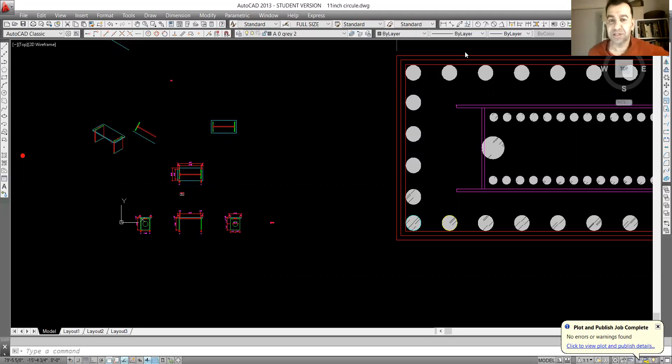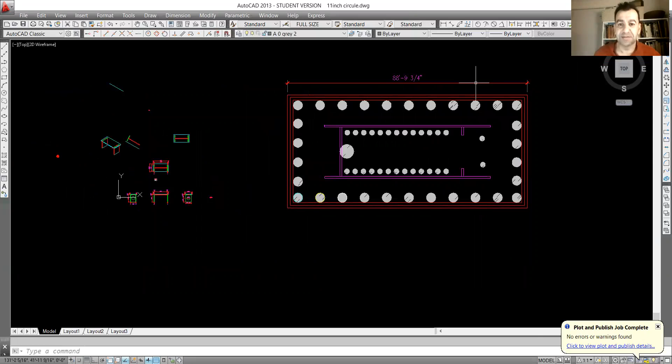One of the most challenging things about AutoCAD is, after using the program for a while, we all start generating drawings in this black space. We can make very small objects like this plate, or gigantic objects like this temple that's 88 feet. One challenging thing is how do you plot or print something like this on a manageable piece of paper? AutoCAD does not make it very easy, so I'm going to explain all the steps it takes to make a beautiful, well thought out drawing.

First step, before I print anything, I have to make sure I have the right layers and the right objects in the right order. So I'm going to open my layers. I have the option to create as many layers as I need, but I already created a bunch for this specific project. I created a layer called A0 and set it to color gray.

Notice when I click this, it's gray. I only use the colors at the bottom of this chart - these are the only ones that my plot style recognizes. Trust me and use any of these colors between 1 and 9. That's all you need to have good quality drawings. So I have A0, A02 - very light, medium, dark, very dark, and super dark.

So I know that blue is light, medium, red is medium light, magenta is darker, cyan is darker, and these ones are very dark. This is how I plan my drawing before I start.

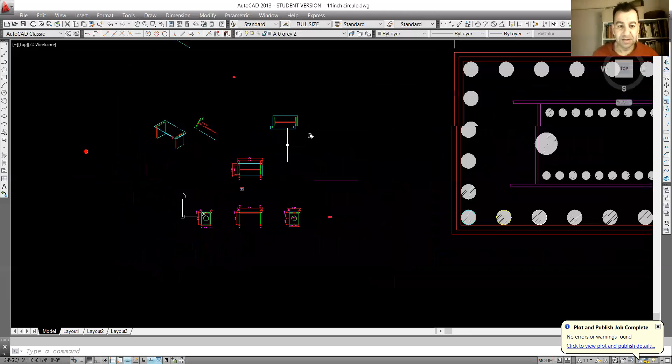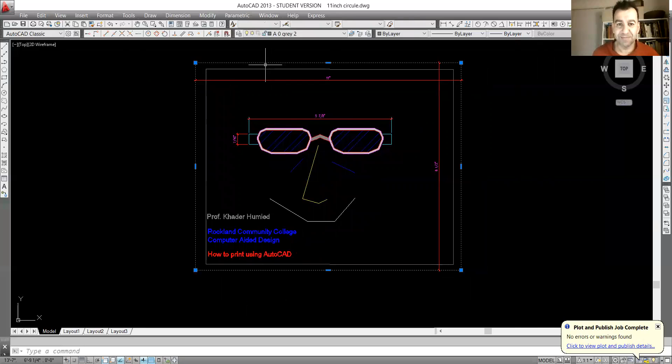For this exercise, I drew this simple project - a pair of glasses. Because I know the size, I can print them 1-to-1, where 1 inch on paper equals 1 inch in reality, and they fit on a piece of paper. I drew a box that's 8.5 by 11 inches, and offset it half an inch to create a border, because most printers don't print exactly to the edge, so I wanted to preserve my edge.

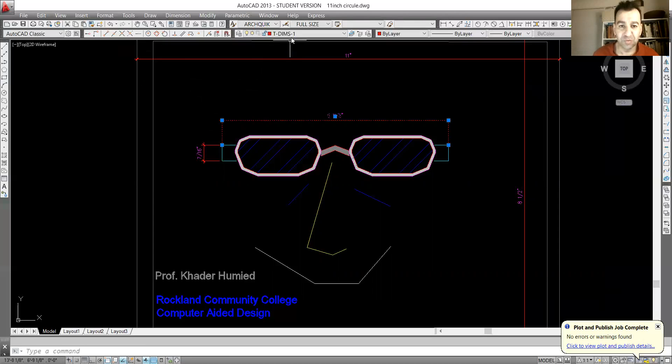I noticed that by mistake, when I click this dimension line, it says medium 4, but when I click this other dimension line, it says T dimension 1. I want them in the same layer. I have two ways of doing it - I could select match properties, pick up this and drop it there. Now when I click on this, see how it says T-DIMS-1? So these two dimension objects are now in the dimension layer.

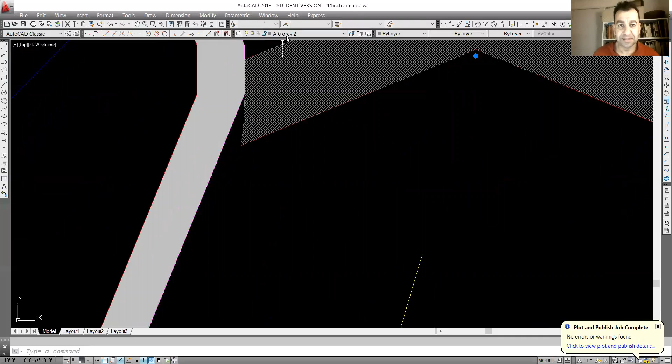This shiny glass is in a very light layer. This gray is in A0 gray 1 layer. This gray, hard to grab, is A0 gray 2 layer. This yellow line is very dark, this white line is super dark. I want to put my name in a medium layer, medium 3.

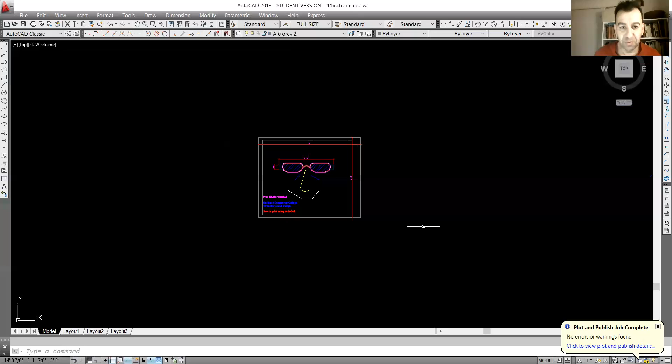So I'm now ready to plot from model space. Remember, model space is the black space where we work, where we start every project from. My units are right, my layout is arranged, I have enough information about my project. I'm printing 1-to-1, 1 inch equals 1 inch.

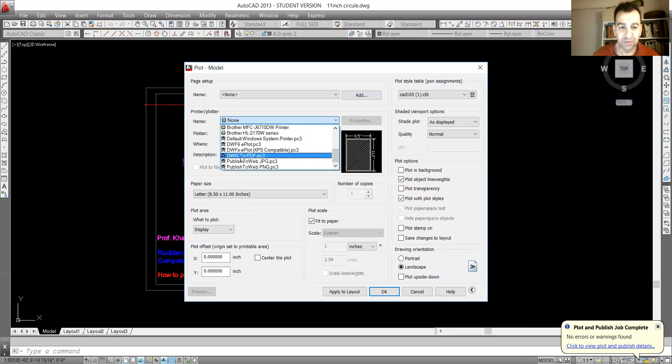So I go to plot - I can get to it from two places, find the icon, or go File, Plot, and this window opens. It's a little confusing because it doesn't say much. So the first thing we look at is selecting Printer Plotter. At home I have a bunch of printers, but I'd like to use DWG to PDF, which converts a drawing to a PDF. Click, I get that selected.

Then I select the paper size - I'll make sure it's not 11 by 17, I want it 8.5 by 11. Then it asks what I want to print, because this is a gigantic model space, so I need to select a specific area using plot area - I'll say window, and click from there to there.

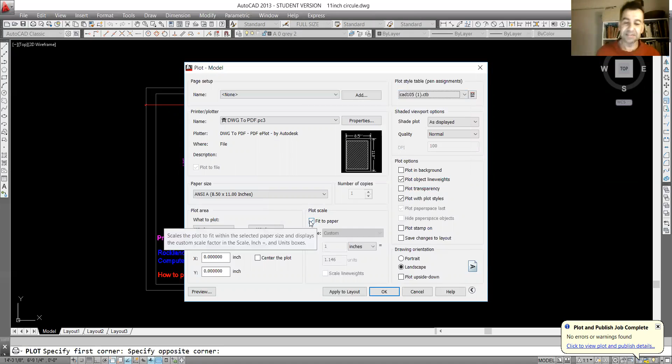Then I make sure I tell it I want to print with this plot style, so I scroll and select CAD 105. Now the last thing to dictate is the scale. Remember, this is model space and I want to print 1-to-1, so I uncheck this and scroll to 1-to-1. I'm going to do a preview.

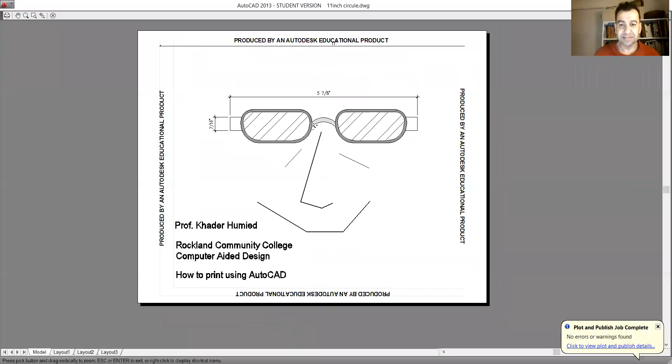I think I have my drawing where I need it - I have the right grays, the right thicknesses, and it fits well on the screen. I'm going to exit this.

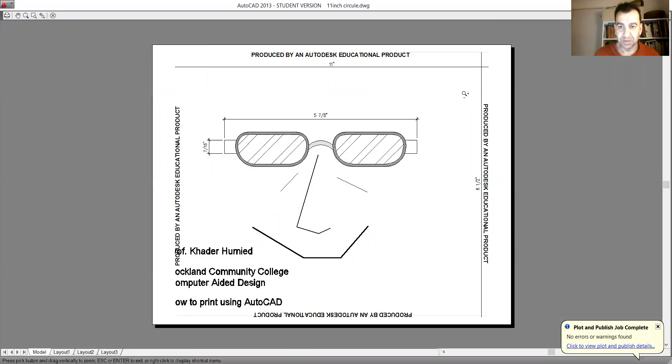Oh, I have an option I didn't choose - if I click center plot, it would center my drawing in the plot. Let's try it. I think the drawing fits better this way because it's centered right and left, but I lost some text on the right and left. I'm going to go fix that - I'll cancel and move my text in this direction a little bit.

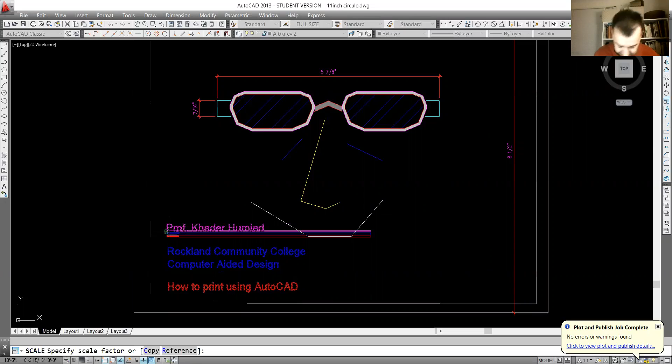I'm going to scale it - select everything there, and scale it to 0.8. Now I'm going to print again.

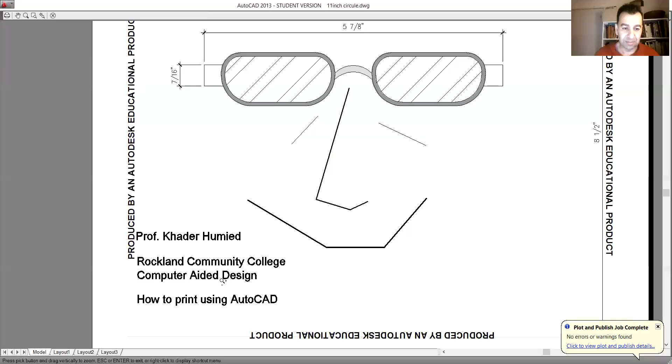I'm going to keep the dimensions, print and do previous plot. It remembered all the settings because I already created them. I'm going to preview again - see how my name is in the border. Everything looks good, I'm going to click plot.

I'm going to name the file glasses. Save. And now my drawing opened.

When I zoom in, notice how this is a very thick line, this is thick but not as thick. These lines are precise - I have thick lines, thin lines, dimensions, and my name. Now this is a drawing that I'm willing to share with the world.

Also notice when I click these layers, I can hide different aspects of the project. Oh, this one gets rid of my educational version of AutoCAD text - I'm going to uncheck it. I lose the gray there, so next time I'll put this in a different gray. It's good to know that A 0 grey 2 gets rid of the border. Now I have a sheet I can share with the world.

I can publish it, share with my friends - you don't have to have AutoCAD to open a PDF drawing, it's a universal file anybody can open. So that's the first aspect of printing from model space. We have to practice this and work with it, and in the next tutorial I'll show you how to print with layout. I'm going to stop now and we'll continue.